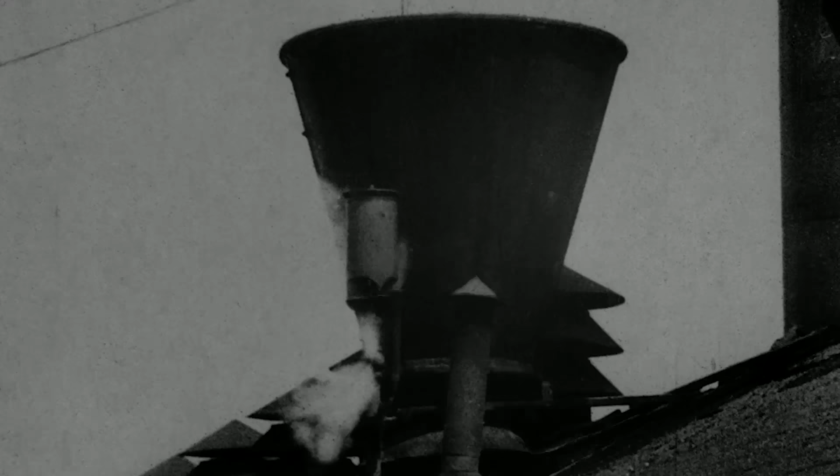Few inventions have had as revolutionary an effect on our society as the advent of the steam engine. This machine allowed the automation of production, creating thousands of new jobs in our cities and drawing humans from our farmland existence to an ever more metropolitan life. The population of London doubled in the first half of the 19th century, as people flooded from the countrysides into London's King's Cross on the very engine that spurred the new trend of urbanisation and industrialisation.

With few options for transport within the city beyond horse and carriage, these new city dwellers had little choice but to live in crowded slums near their places of work. Areas like Whitechapel and Spitalfields that were once home to the prosperous Victorians and French Huguenots became disease and crime-infested homes to the working class. These areas had one thing in common: they were within walking distance of King's Cross, the supply line of the city's new factory workers.

London needed a new transport system to allow these workers to spread out and prevent overcrowding, but with little space above ground for an urban rail system, London city planners needed a novel approach, and so the world's first underground rail system was born.

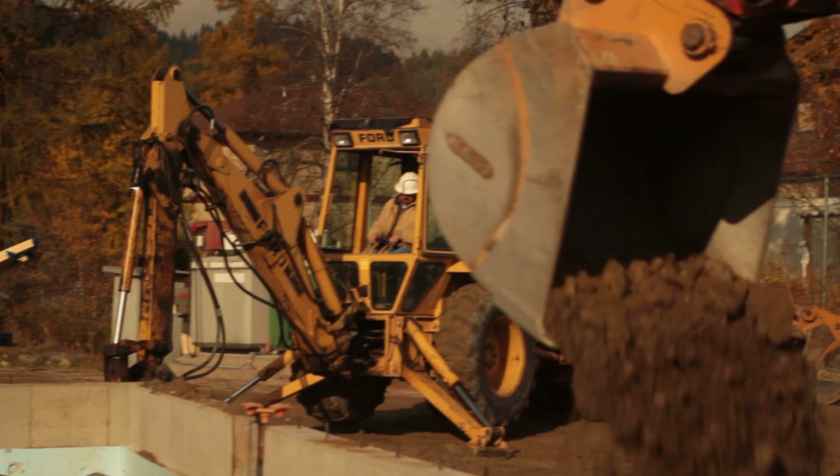Our ancestors have probably been digging burrows and tunnels since they climbed down from the trees, but the earliest tunnels we know of existed as far back as 2000 BC. Most tunnels were created for mining or military engineering, often through stable rock and over short distances. In fact, the word for mining and mine, used for an explosive device, are closely linked for exactly this reason, as early tunnel technology was developed in order to approach fortification walls undetected to place an explosive charge.

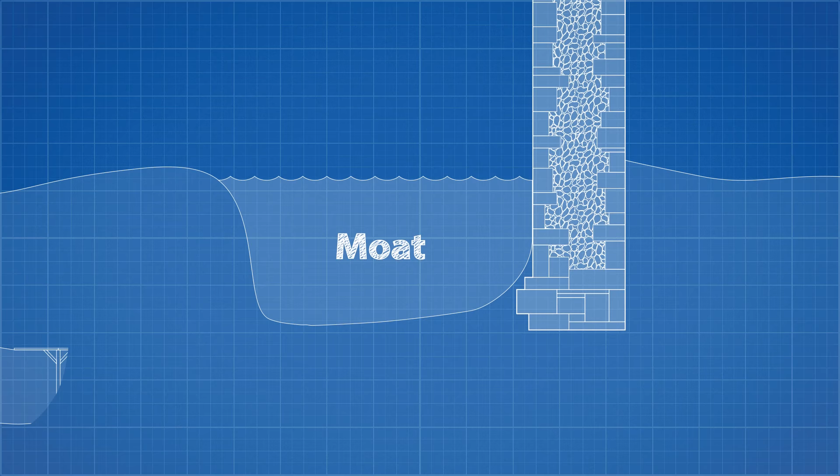One of the primary reasons moats became popular was because groundwater mixed with soft porous soil was one technical problem these early engineers had no solution for. Constructing tunnels was, and still is, dangerous work. Tunneling accidents were common, whether it be from flooding, tunnel collapse due to inadequate reinforcements, or explosions. The fear of collapse was always on the mind of these workers who dug these tunnels with simple tools like pickaxes and shovels in dark, claustrophobic environments.

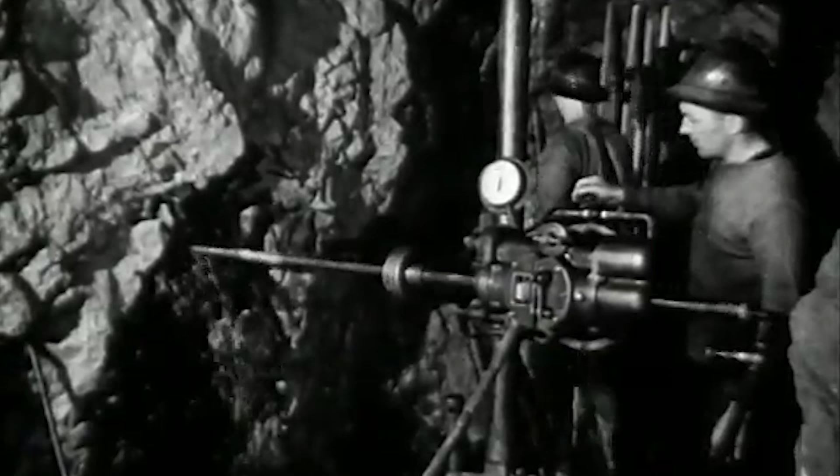Despite the constant risk, civil engineering made huge strides in tunnel building techniques over the course of the 19th century, starting with the world's first underground railways in London. The development of the London Underground was made vastly easier thanks to the London clay, which the city is built upon. Although the soil today makes it difficult to build skyscrapers as it cannot support their weight, it is ideal for tunnelling, being soft yet relatively stable.

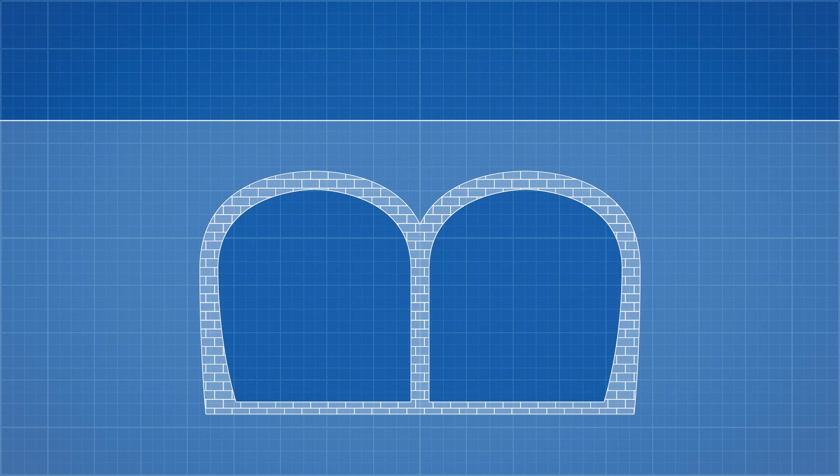London's first underground railway line, the Metropolitan line, began in 1863 and was mostly built using the cut and cover technique. A trench would be dug, walls and a supporting roof structure built, and then buried again. A safer and easier tunnelling technique, but it resulted in the demolition of streets or whole city blocks. Even today, the remnants of this construction technique can be found with hollow buildings hiding the scars of London's past.

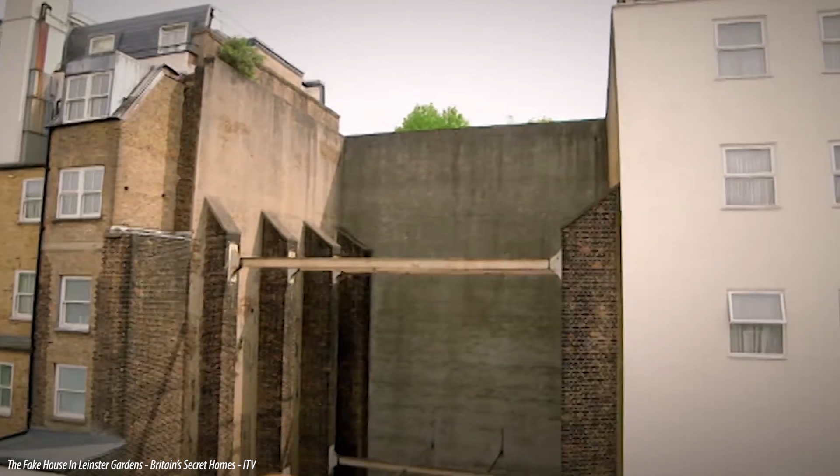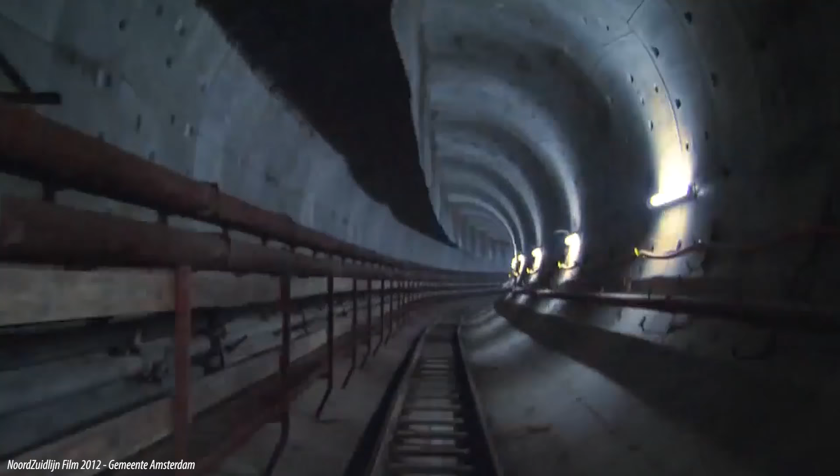The metro in Paris was largely constructed this way, and in 1970s Amsterdam, the use of these cut and cover techniques led to the Nieuwmarkt riots, and even an attempted bombing at one of the new metro stations. The new 3.5-kilometre line forced the destruction of numerous homes in a time when Amsterdam was struggling with a housing crisis. The plans for a complete Amsterdam underground were abandoned as a result. No new subway line would be built through the city centre until 2003 with the help of a tunnel boring machine, which began life in London in 1825.

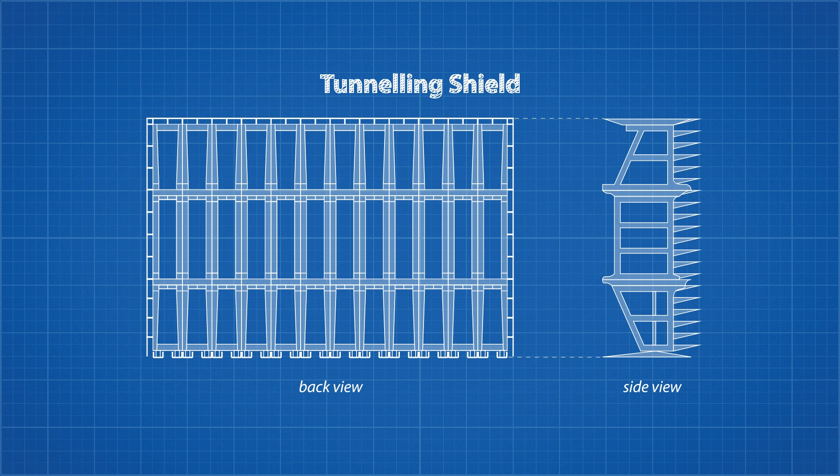Marc Isambard Brunel, together with his son Isambard Kingdom Brunel, invented a technique to make tunnelling somewhat safer and less invasive: the tunnelling shield. This shield was a scaffold-like wrought iron structure with 36 chambers, each containing a single workman. These chambers were further broken down by poling boards, which were horizontal planks of wood that the workers removed individually to hew out the tunnel wall to a predetermined depth before replacing the board and moving on to the next section. Separating the tunnelling face like this compartmentalised the constant risk of tunnel collapse, reducing the chance of a small collapse in the face cascading and causing a total collapse, burying every worker in the area.

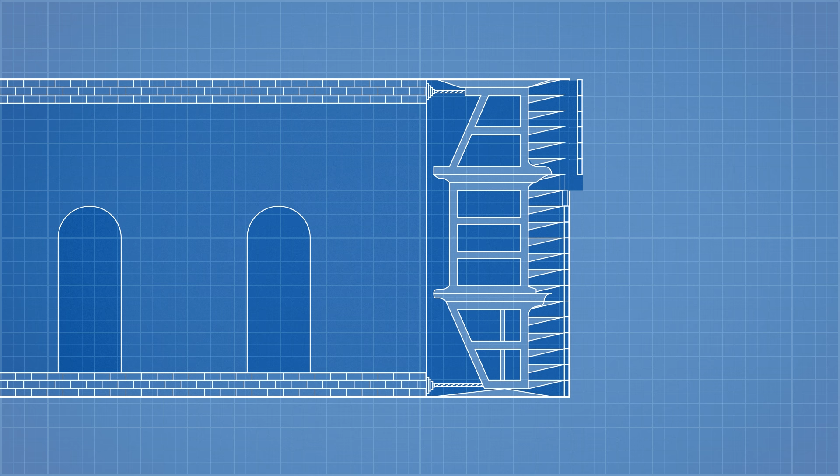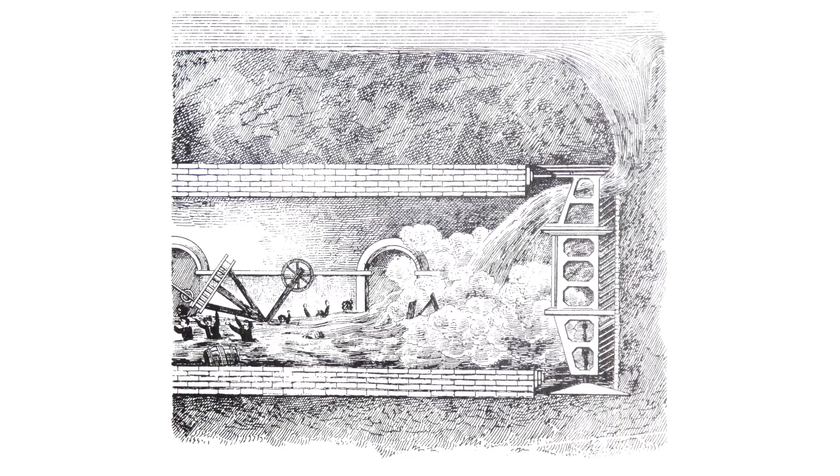Once each worker had finished their work, the entire shield would advance while bricklayers rushed to finish supporting brickwork behind the shield. This early concept laid the foundation for all future tunnel boring machines, but much was left to be improved. Construction of Brunel's Thames Tunnel was fraught with problems despite this new tool. Water constantly seeped into the tunnel, which was a nuisance while pumps were operational, and a disaster when the pumps failed in the summer of 1826, resulting in the tunnel flooding up to 12 feet with polluted Thames river water.

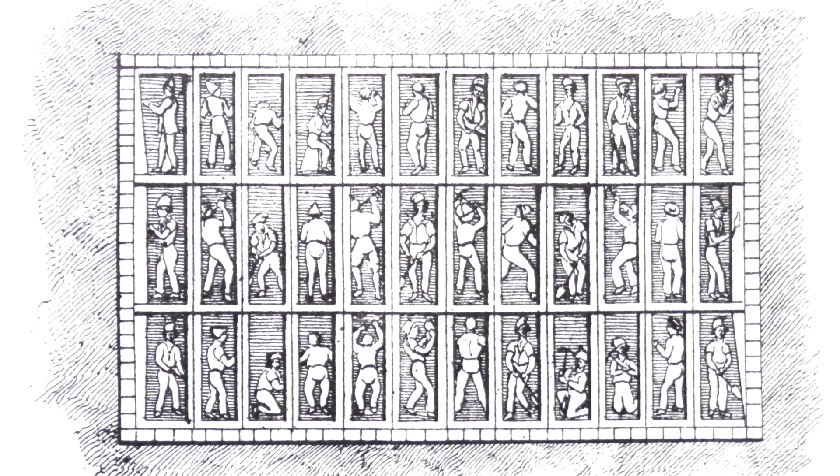This, combined with poor ventilation, made working conditions horrendous. Temperatures rose and plunged with no warning, and workers complained of illness ranging from headaches and diarrhea to temporary blindness, and one worker died from his illness.

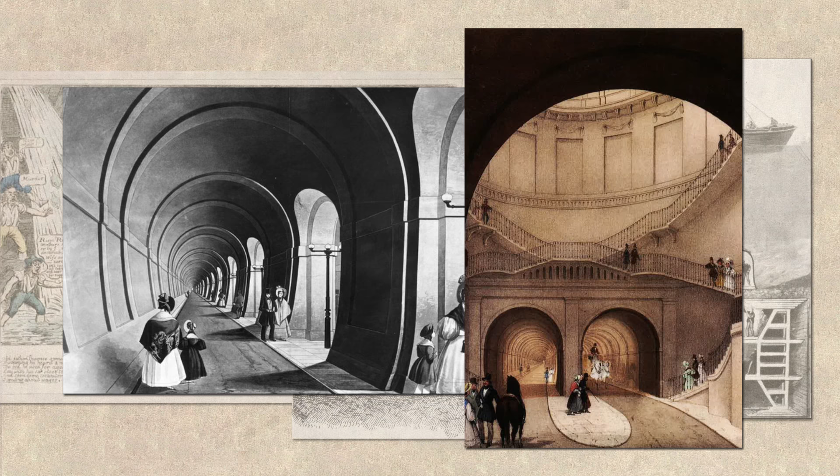This was just one of many problems that Brunel encountered, and we would need an entire video to document it all, but the team persevered, and 18 years later, with the painfully slow progress of just 4 inches a day, the tunnel opened to pedestrian traffic in 1843. The project tested the technology of the time and provided vital lessons for future projects.

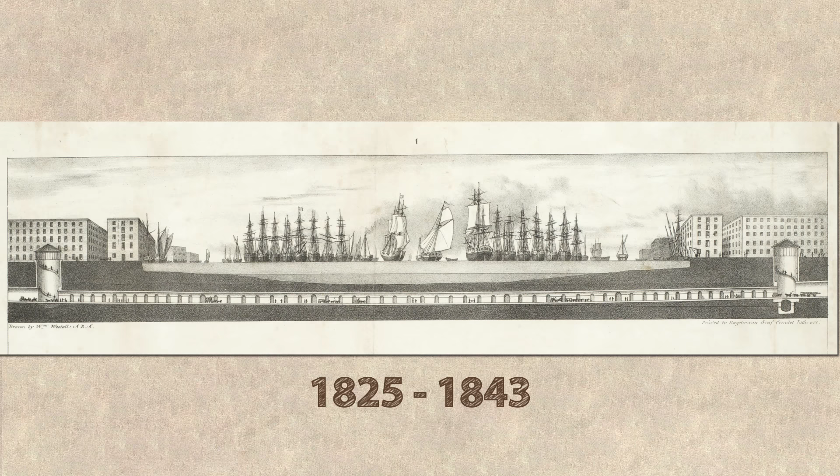In 1869, a second passage was dug under the Thames from Great Tower Hill to Pickle Herring Stairs. It was built with a much improved version of the tunnelling shield by Peter William Barlow. Barlow made one crucial change to the design. Instead of a rectangular cross-section, he made the shield circular, improving its ability to support the surrounding soil and the swelling of the Thames River above it.

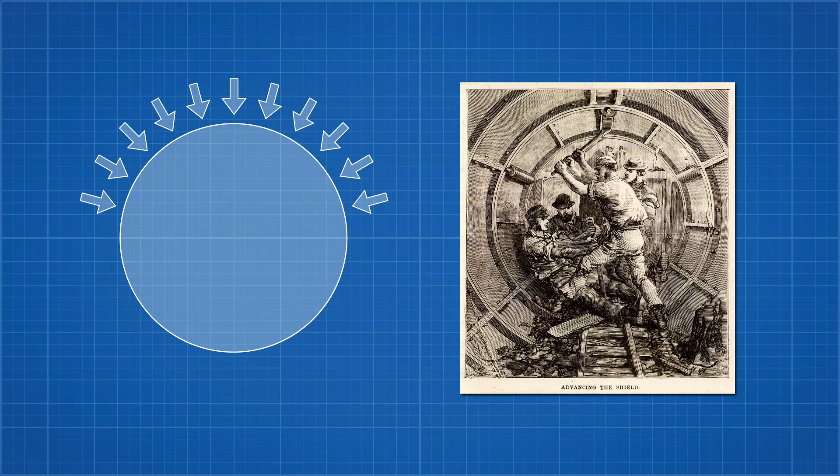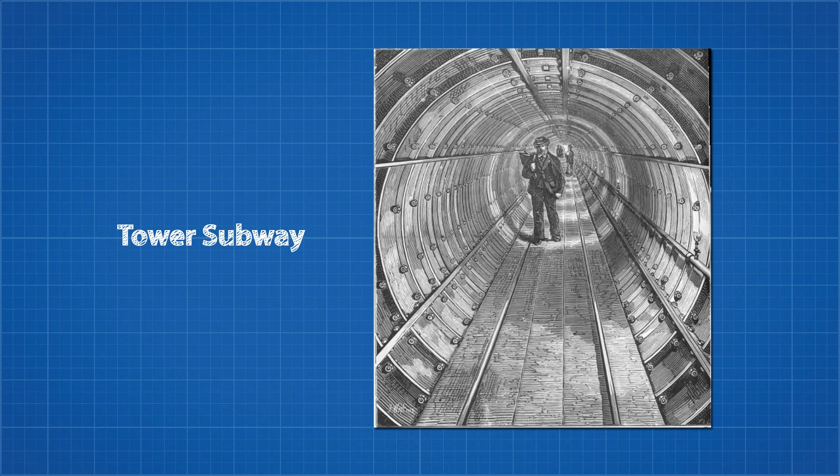This passage under the Thames was fitted with a narrow gauge railway, and a cable-hauled wooden carriage carried passengers back and forth. This proved to be uneconomic, and the company went bankrupt within a year. The tunnel was then converted for pedestrian use and became known as the Tower Subway. It was relatively cheap to cross the Thames this way. However, when the toll-free Tower Bridge was opened, the subway's income dropped and it was sold in 1897. Currently, it's in use as a utility tunnel for water mains.

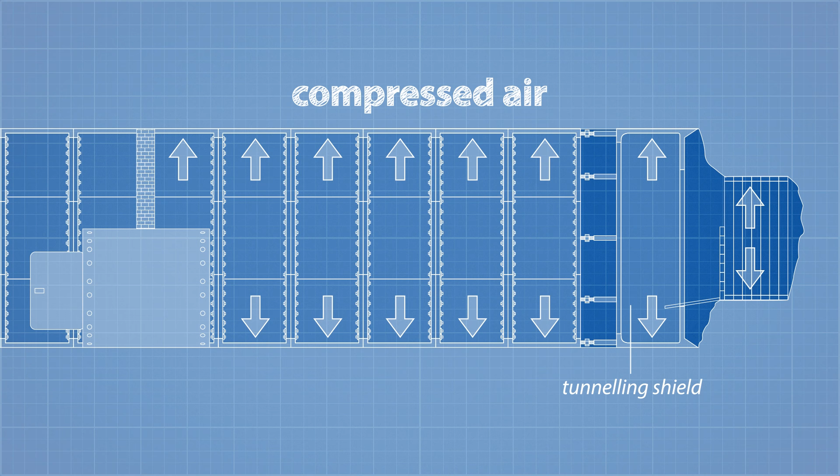Barlow's design was further improved upon by James Henry Greathead when constructing the City and South London Railway, nowadays part of the Northern Line. Using compressed air, tunnelling below the groundwater table became safer, as the pressurised air prevented water inflow into the tunnel. Workmen would enter and exit the excavation through an airlock. This, together with a circular shield and cast iron rings to line the tunnel walls, made for a much safer and efficient job.

This is how many of the deep-level tube lines were built, and travellers on the underground could still see the cast iron rings lining the tunnel walls in certain places. The circular shape of the tunnels this method created inspired the London Underground's name, the Tube. To this day, most tunnelling shields are loosely based on the Greathead shield.

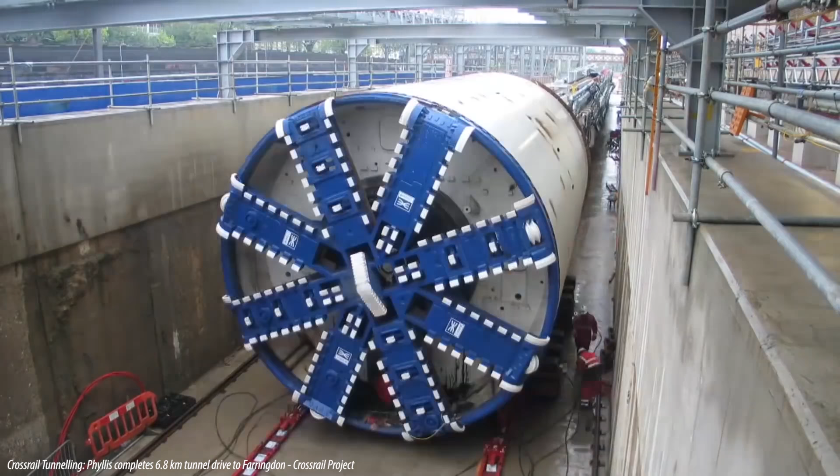Modern-day tunnels, like the Royal Oak to Farringdon tube line, are built using TBMs, or tunnel boring machines. These long machines consist of several sections and essentially form an automated assembly line for tunnel boring. The front section of the machine is a modern version of the tunnelling shield. However, nowadays it features a rotating cutter head. These rotating heads can be equipped with different tools depending on the type of soil.

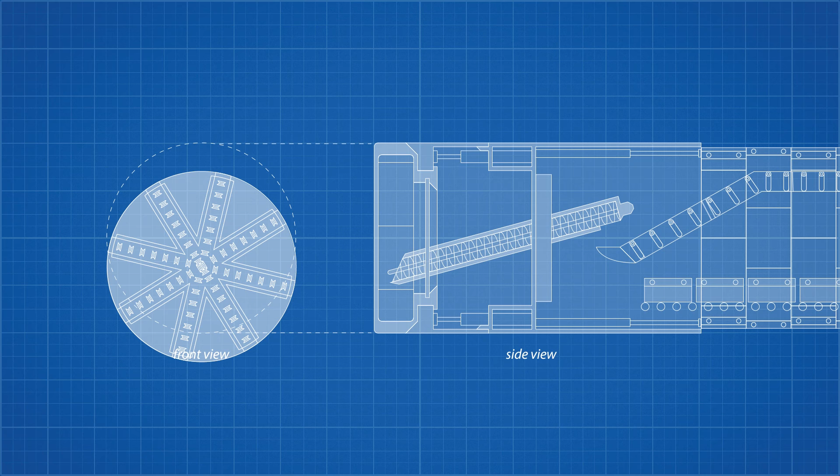As the head rotates, the loosened soil enters the mixing chamber directly behind the cutters, where a screw conveyor transports the soil out of the cutter head and onto a conveyor belt. This conveyor belt then transports it out of the tunnel, while the machine automatically installs reinforcements as it progresses. These new machines allowed the London Underground to expand even further with minimal disruption to life on the surface, with possible future improvements decreasing the cost and time needed.

Through endeavours like Elon Musk's Boring Company, our societies could be in for more radical change. With ever-growing city populations, empowering people's movement can and will increase our quality of life, just as these early engineers facilitated a radical societal change for the working class in cities like London.